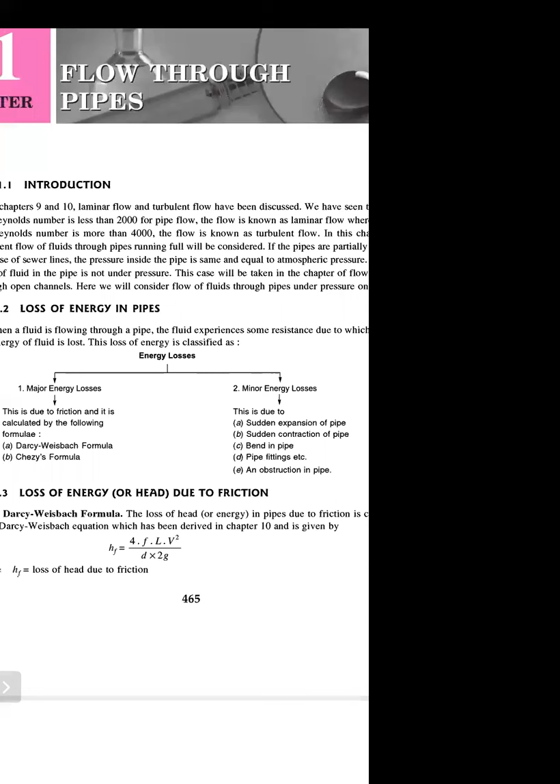Generally, in flow through pipes, problems ask about major loss and minor loss calculations. Major loss in pipe and minor loss in pipe - how to calculate loss of energy through that?

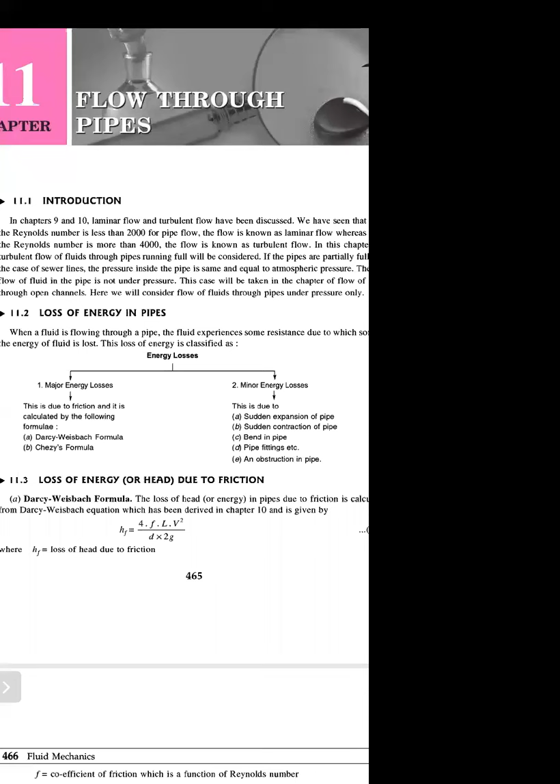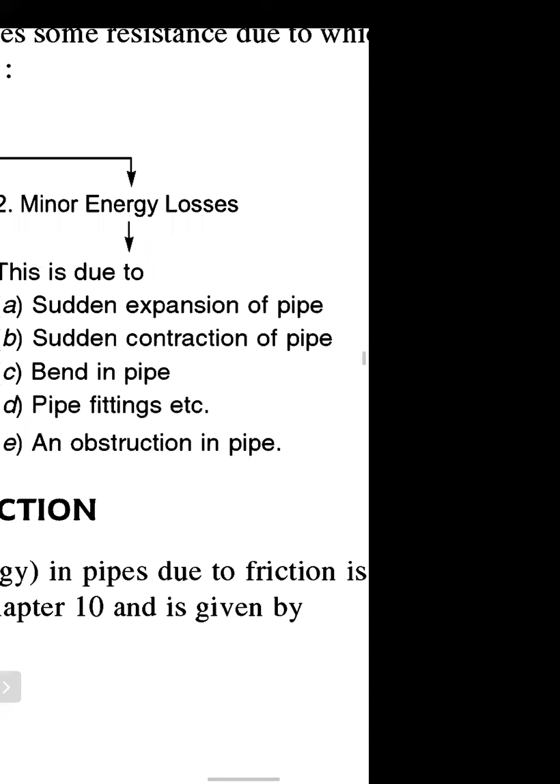Then the second type of minor loss is loss due to sudden contraction of pipe. As explained for expansion, suppose 10 centimeter diameter pipe at section 1, then it suddenly becomes 50 centimeter - then suddenly from section 1 to section 2 there is expansion of pipe.

Similarly, sudden contraction of pipe is there. In sudden contraction of pipe, initial diameter is greater than final diameter. It means if diameter of section 1 is suppose 50 centimeter and diameter of section 2 is 10 centimeter, then there will be sudden contraction of pipe. That loss is sudden contraction of pipe, which is taken in minor energy loss.

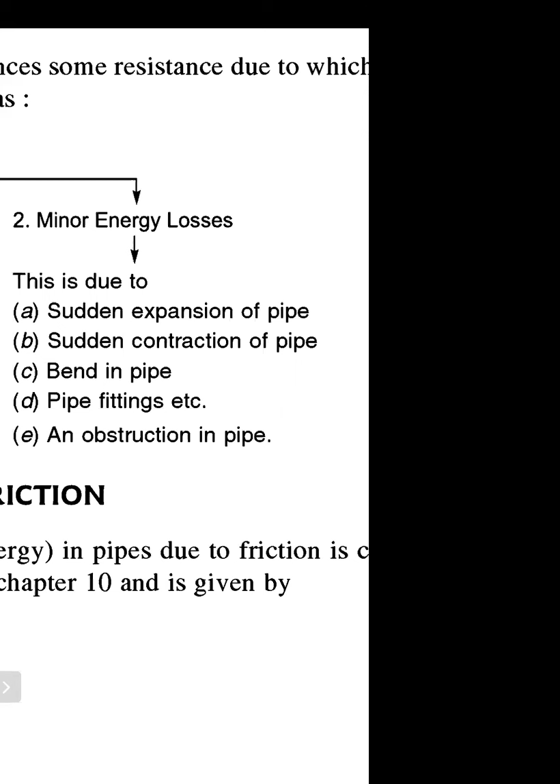In major losses, generally loss due to friction is major loss, and that friction loss is to be calculated by the following formulas: Darcy-Weisbach formula and Chezy's formula. Loss due to friction is major loss, and that is calculated by the Darcy-Weisbach equation or Chezy's formula.

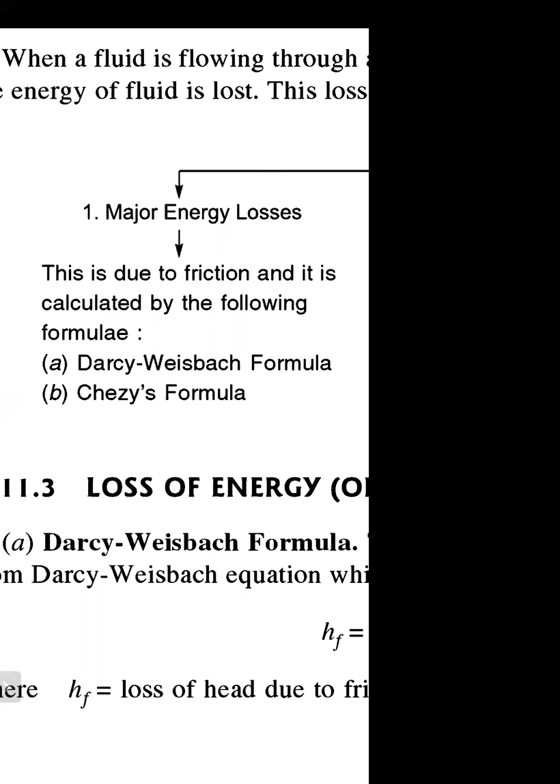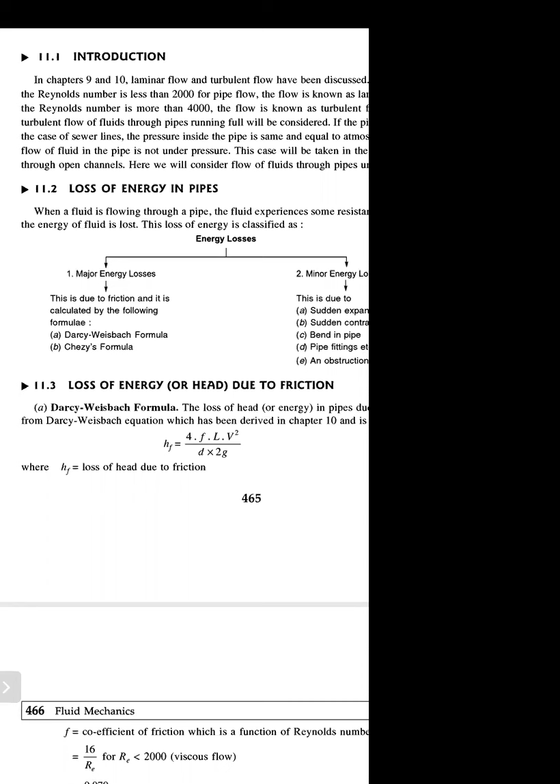Then major loss, loss of energy due to friction, generally by the Darcy-Weisbach equation: HF is equal to 4FLV square upon 2GD. In that, HF is head loss due to friction, f is the coefficient of friction, and the value of f is to be taken as f equals 16 upon RE when RE is less than 2000, where RE is the Reynolds number.

If Reynolds number is less than 2000, then coefficient of friction f is equal to 16 upon Re. And if it is varying from 4000 to 10 raised to 6, then the value of small f is 0.079 upon Re raised to 1 by 4.

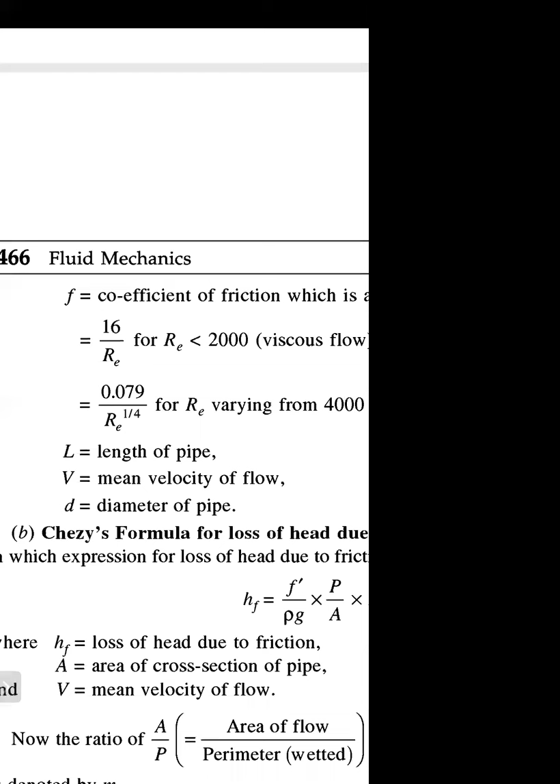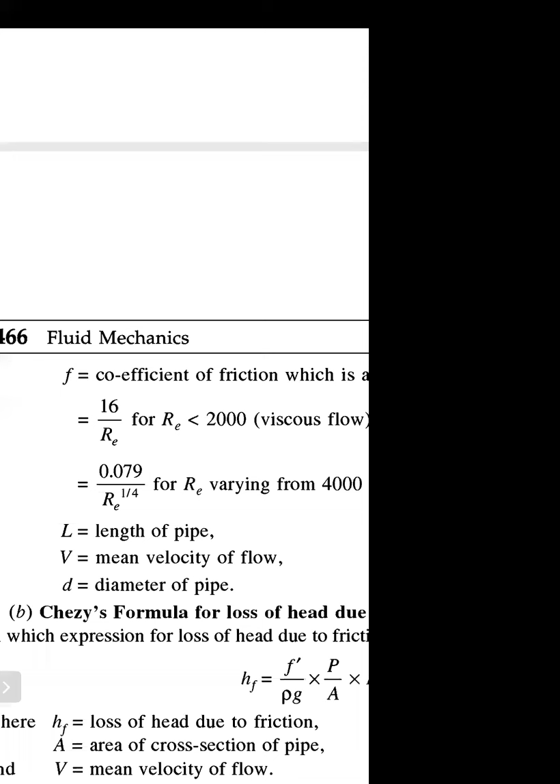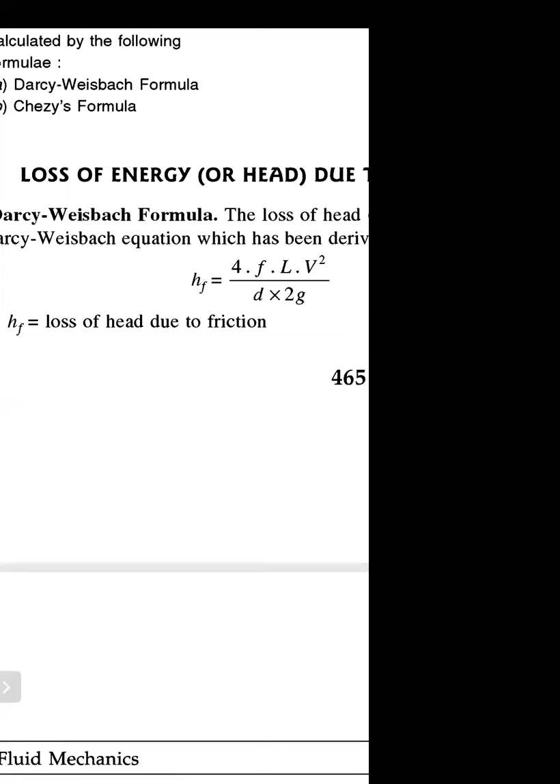According to the value of Reynolds number, coefficient of friction small f is to be changed. Put that value of f, value of length, velocity, diameter, and g, then you will get head loss due to friction, HF equal to 4FLV square upon 2GD.

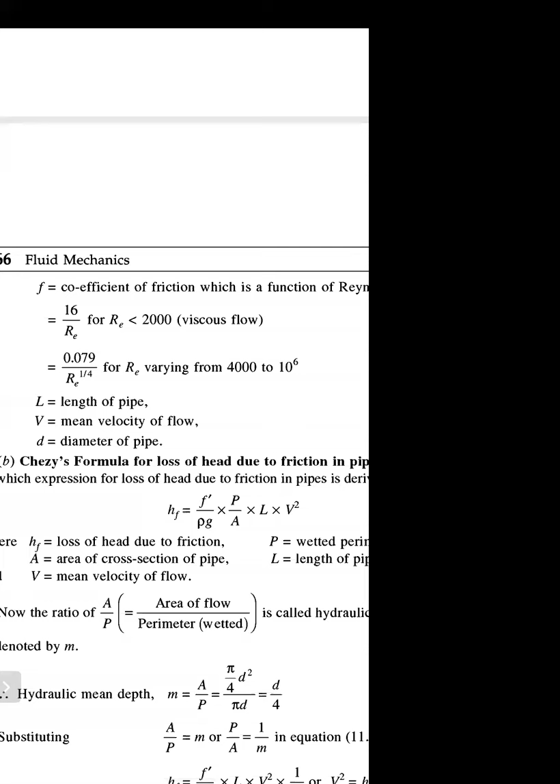This is the Darcy-Weisbach equation, 4FLV square upon 2GD. This is the major loss due to friction, and that major loss is generally calculated by the Darcy-Weisbach equation. That major loss is also calculated by Chezy's formula.

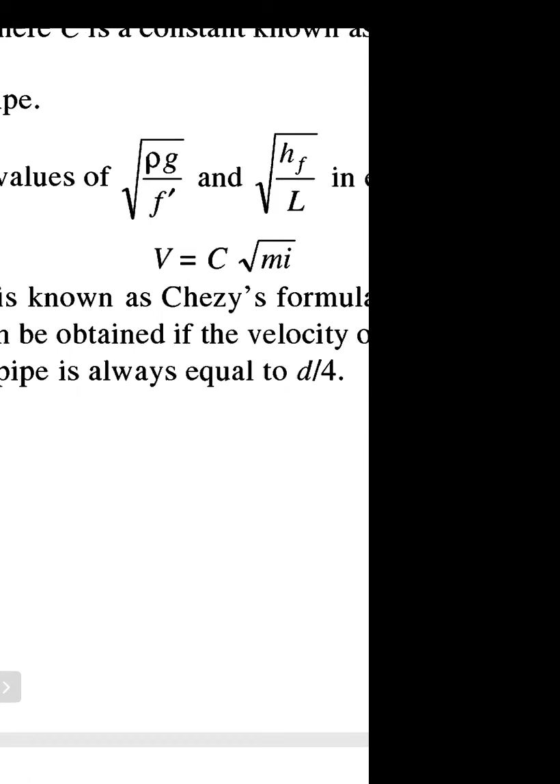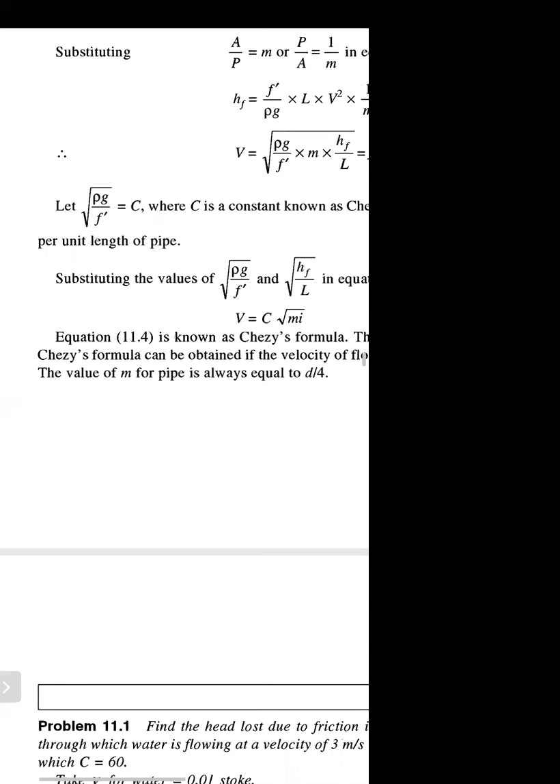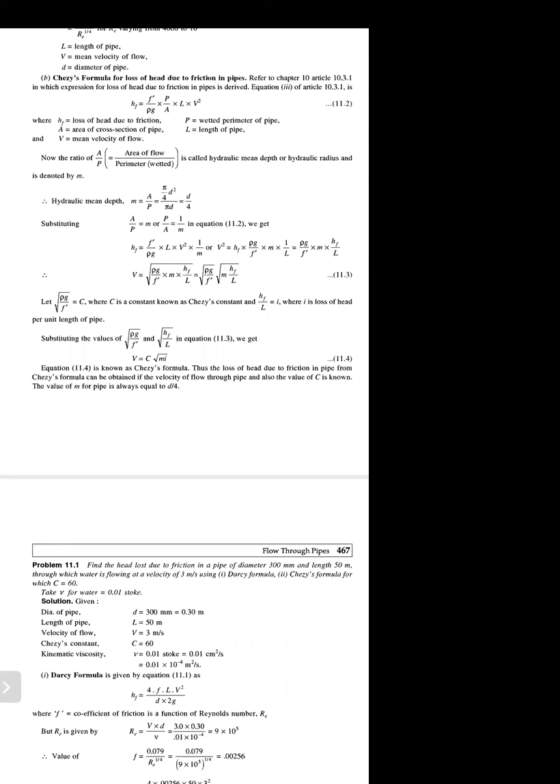What is Chezy's formula? V is equal to C under root of M into I, where V is the velocity, C is the Chezy's constant, M is nothing but hydraulic mean depth, which is area upon perimeter, and I is loss of head due to unit length of pipe. This is the Chezy's formula for calculation of friction in pipe.

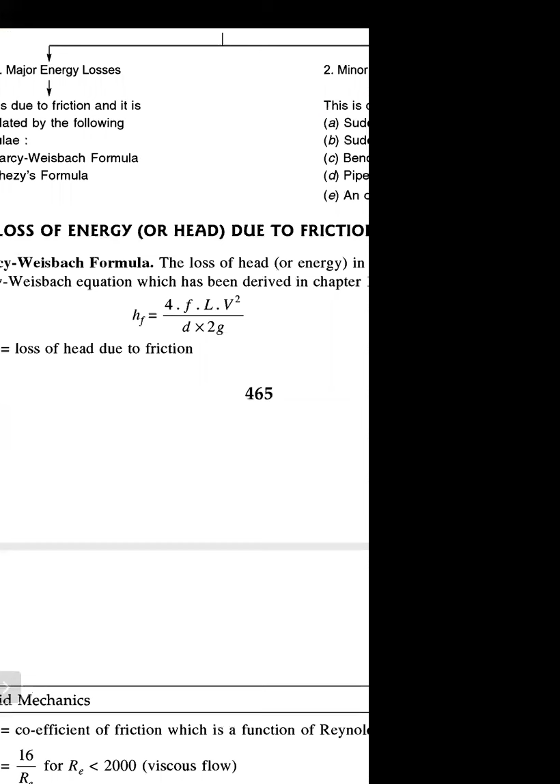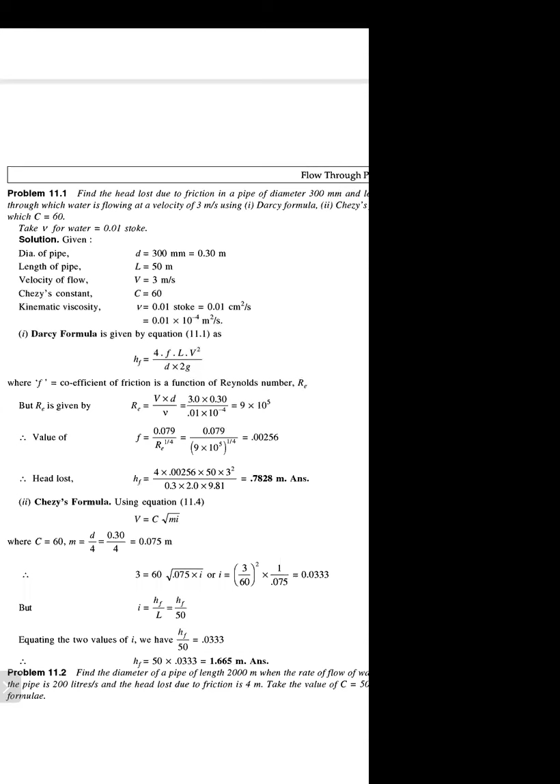There are some problems based on the Darcy-Weisbach equation as well as Chezy's formula.

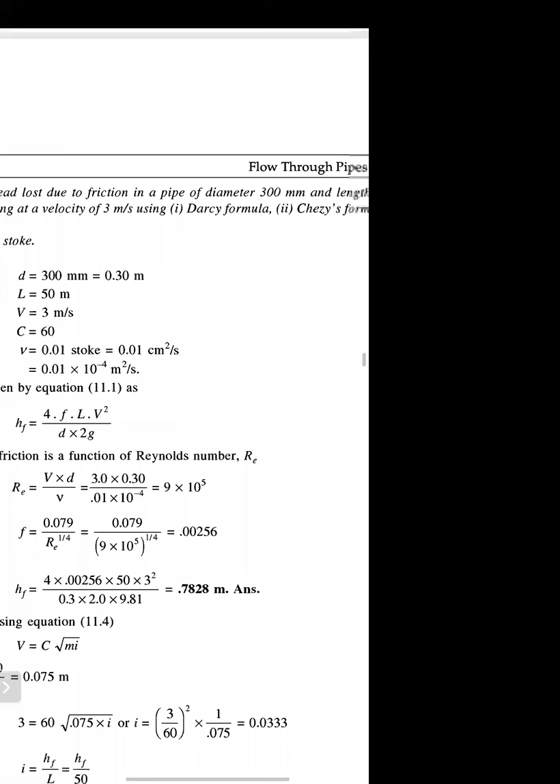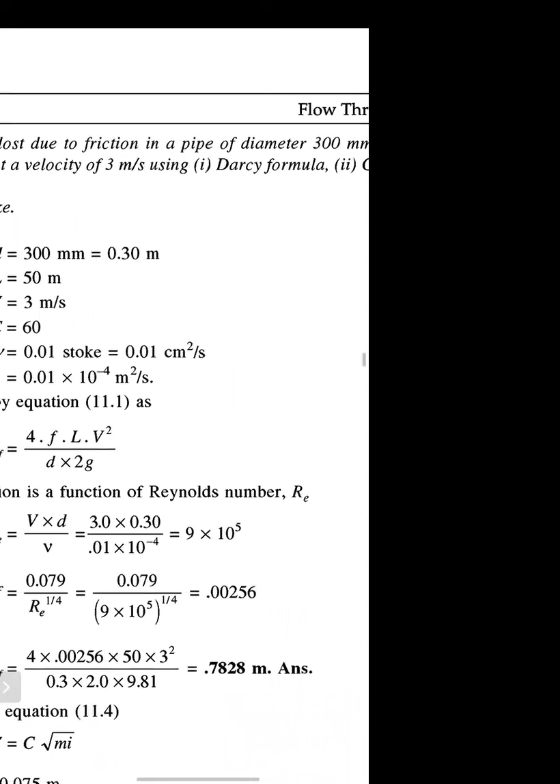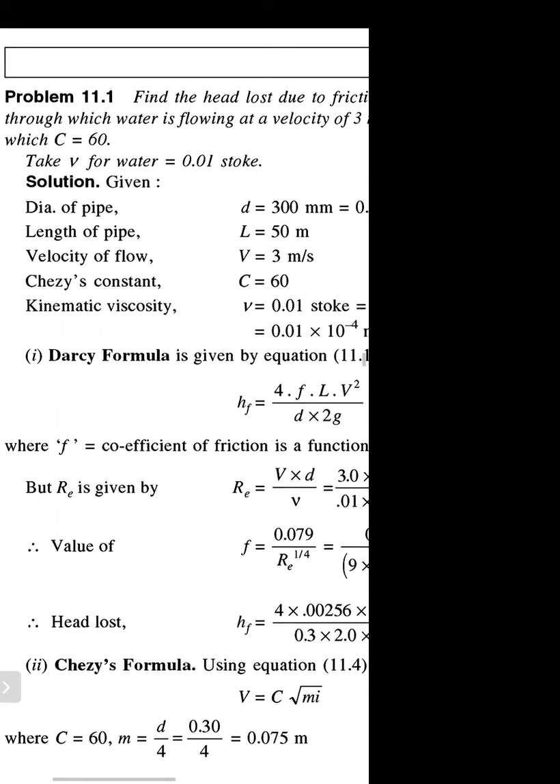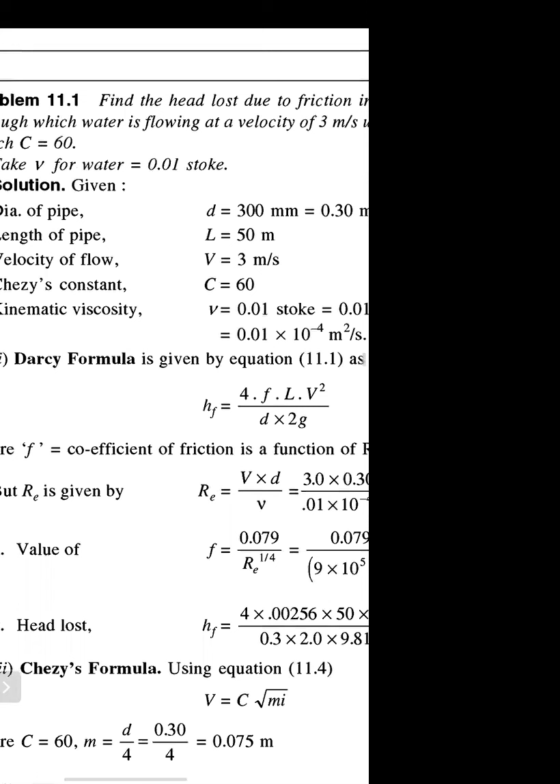First problem: find the head lost due to friction in a pipe of diameter 300 mm and length 50 meter, through which water is flowing at velocity 3 meter per second. Using Darcy's formula and Chezy's formula, for C is equal to 60, take kinematic viscosity of water as 0.01 stoke.

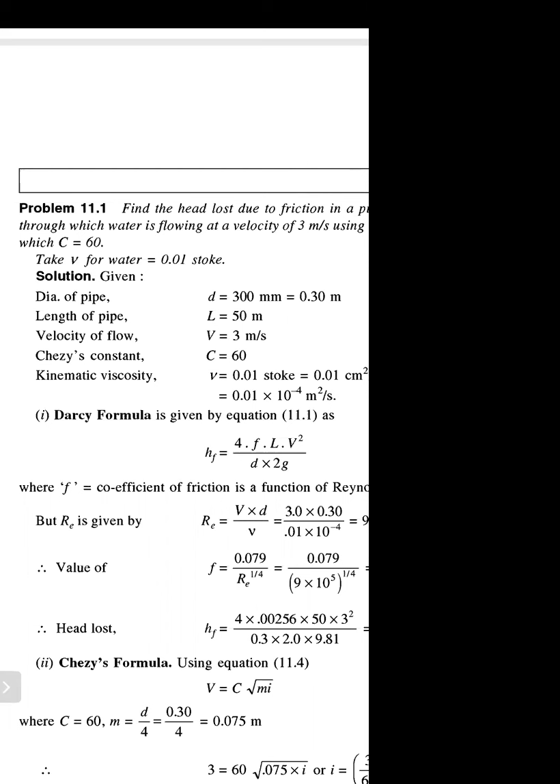Head loss due to friction means we have to calculate major energy loss through that pipe. According to given data, D is diameter 300 mm, length 50 meter, velocity 3 meter per second, Chezy's constant is given, and kinematic viscosity is given as 0.01 stoke, convert it into meter square per second: 0.01 into 10 raised to minus 4 meter square per second.

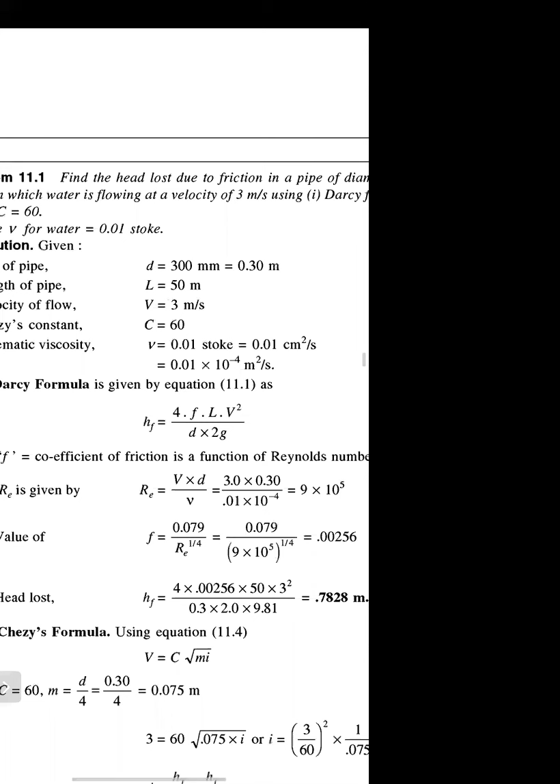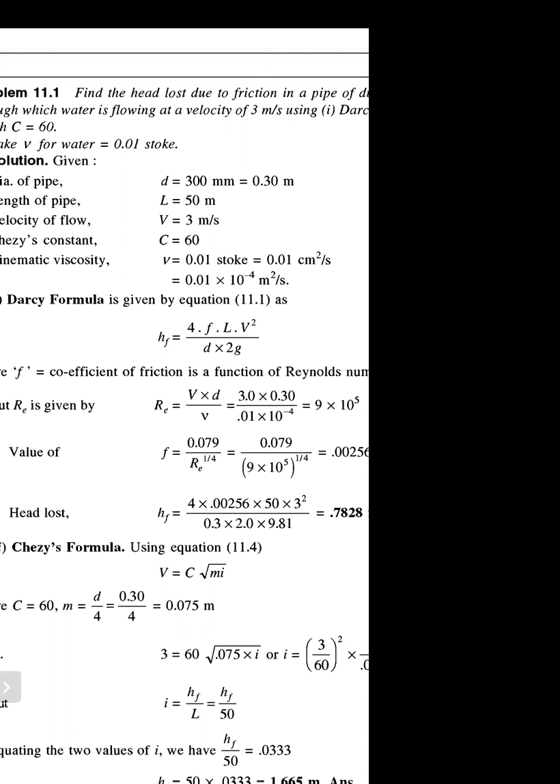Put the above value in Darcy formula because we have to calculate head loss due to Darcy formula first, and in second case Chezy's formula. Our Darcy formula is HF equal to 4FLV square upon 2GD.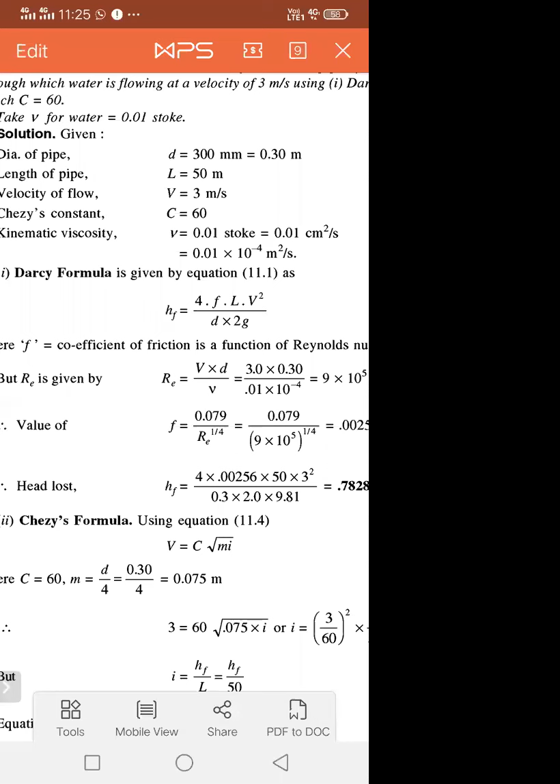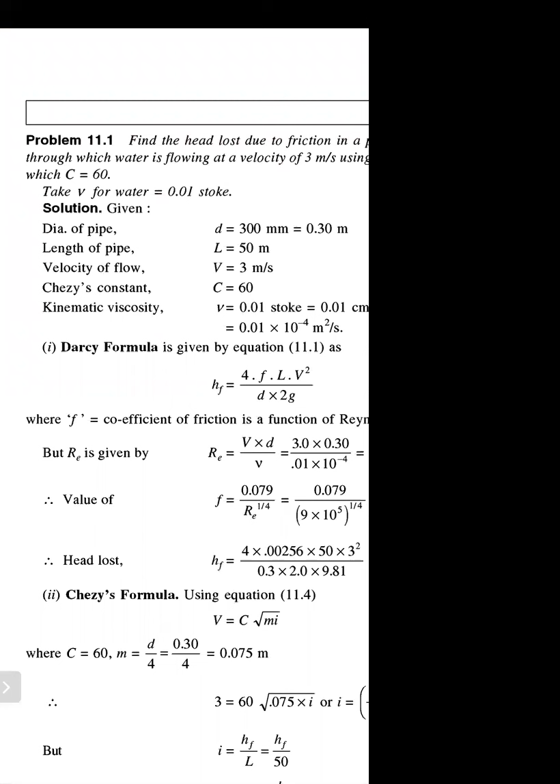Now calculate the value of F. As we know, value of F is to be calculated according to the value of Reynolds number. But we don't know the value of Reynolds number yet, so first calculate value of Reynolds number.

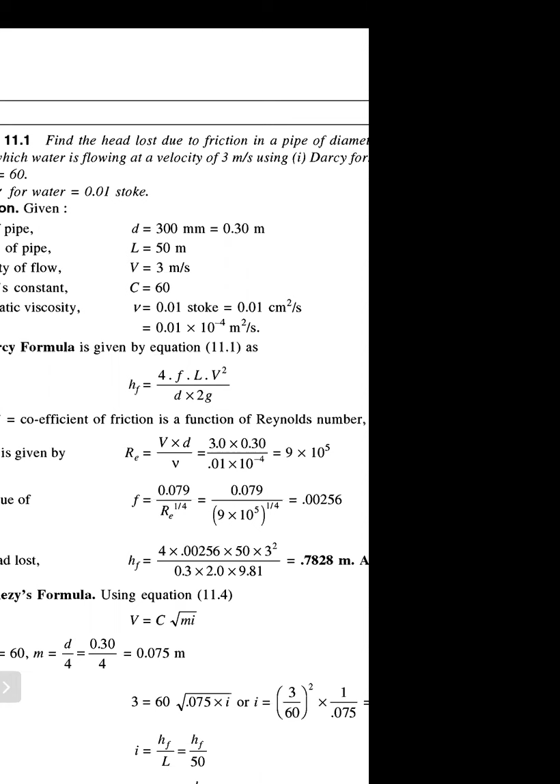The value of Reynolds number is calculated by V into D upon viscosity, whether it is mu or gamma. Therefore Re equals V, velocity 3 meter per second, diameter 0.30, and viscosity 0.01 into 10 raised to minus 4. By putting these values, your Reynolds number becomes 9 into 10 raised to 5.

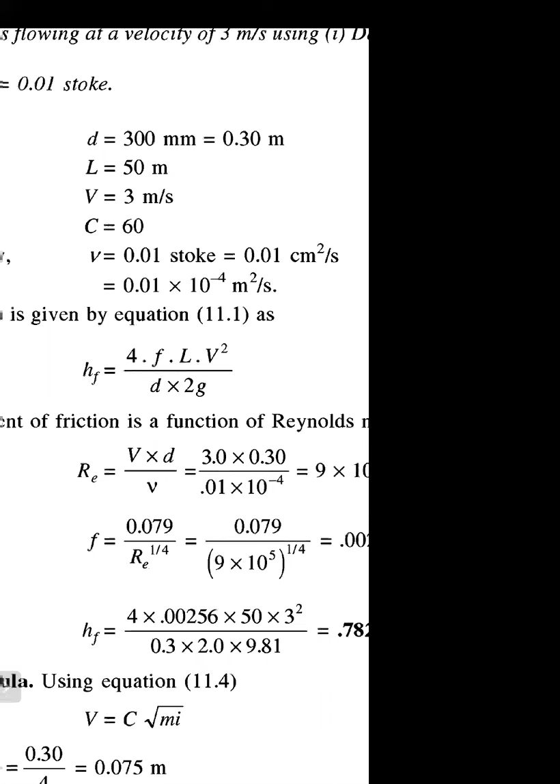Then calculate the value of small f, because we have to calculate head loss due to friction HF. For that, we should know the value of small f, coefficient of friction, as it is not given in the problem.

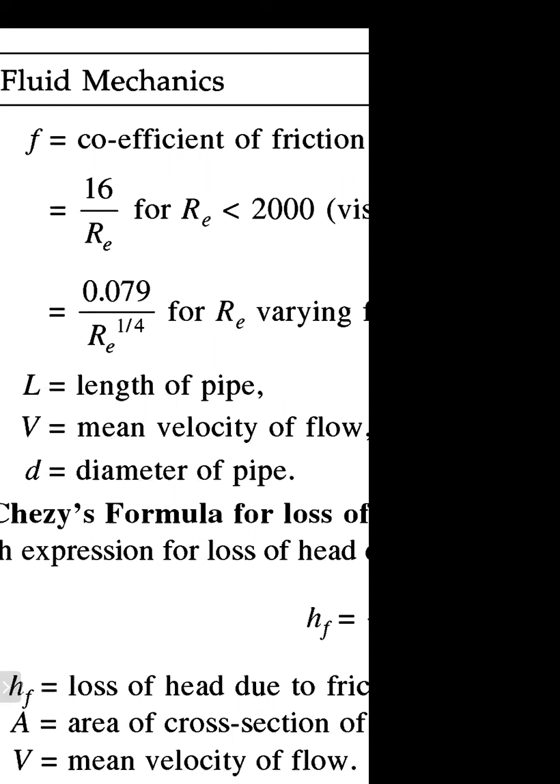As I had already told, according to the value of Reynolds number, coefficient of friction is calculated by F equal to 16 upon Re if Re is less than 2000. But if it is varying from 4000 to 10 raised to 6, then it is 0.079 upon Re raised to 1 by 4.

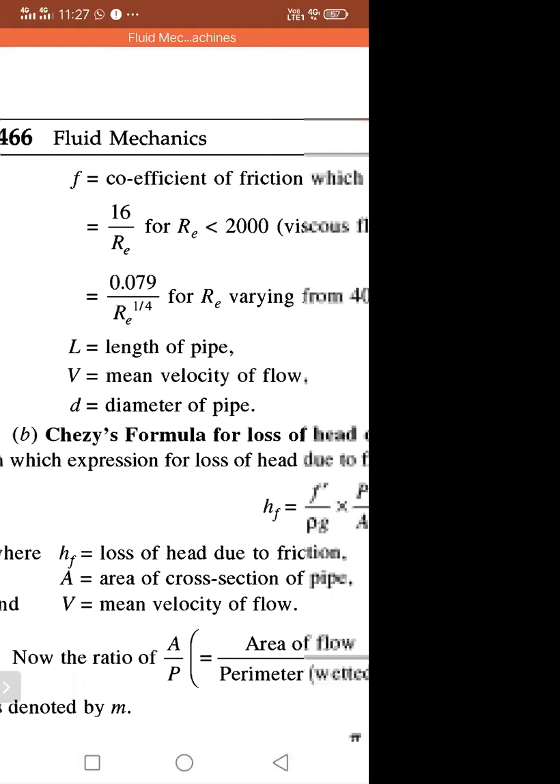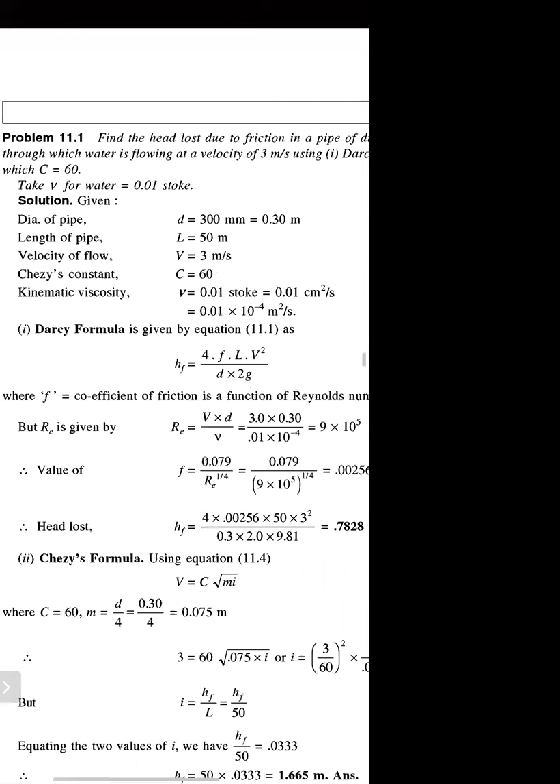From this formula, calculate the value of small f here. Value of small f is equal to 0.079 upon Re raised to 1 by 4, as it is greater than 4000 and in between 4000 to 10 raised to 6, being 9 into 10 raised to 5. Therefore F you will get.

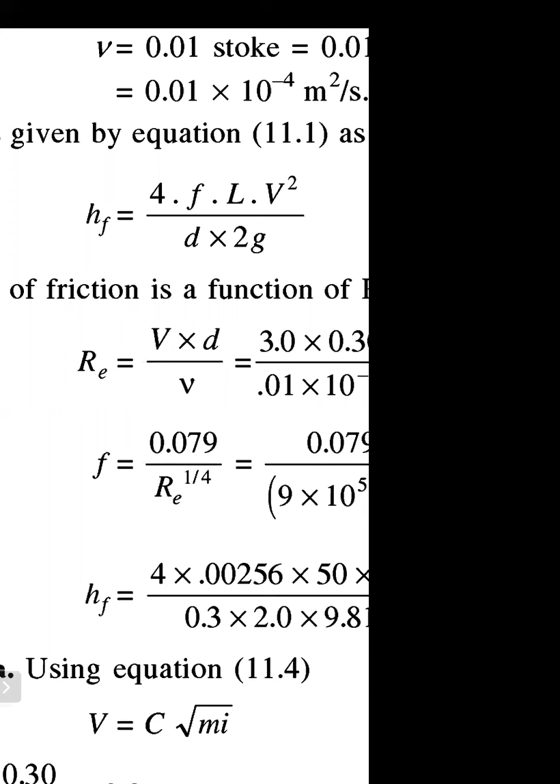F equals 0.00256. Now put the value of F and value of L, V, D, G in the Darcy-Weisbach equation. You will get HF, which is 0.7828 meter, head loss due to friction.

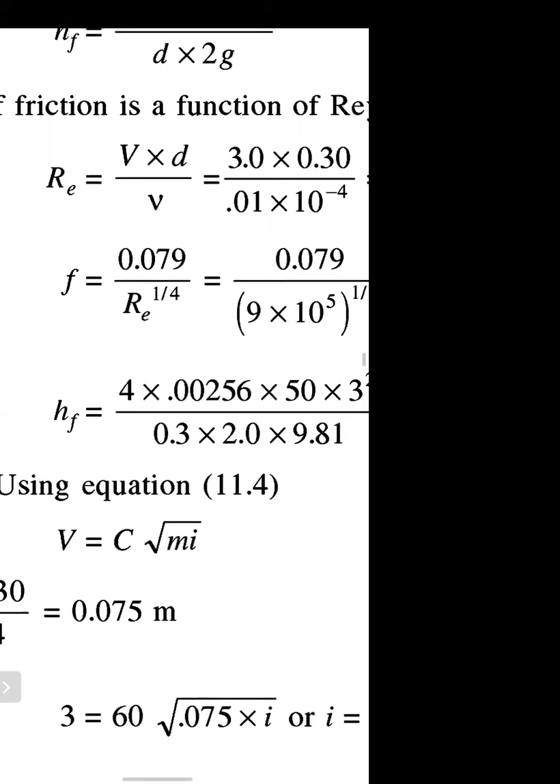Now again, we have asked in the second point to calculate head loss due to Chezy's formula.

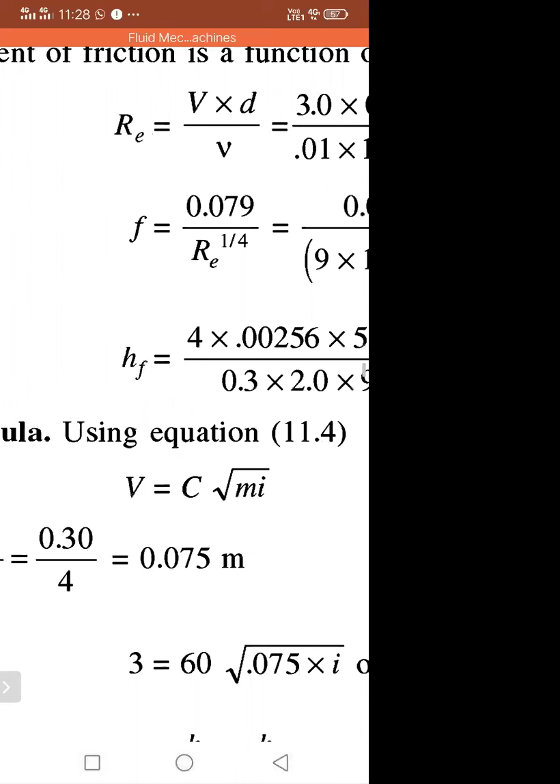Okay, calculate head loss due to Chezy's formula. For Chezy's formula, the value of C is given. Then calculate value of M, which is D by 4, and you will get 0.075. And I is to be calculated by I is nothing but HF upon L. Then calculate I, put that value in the above equation, you will get the value.

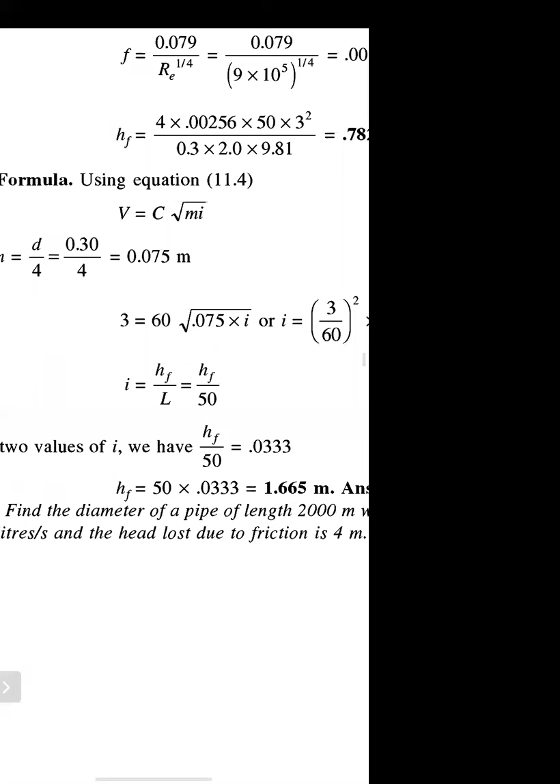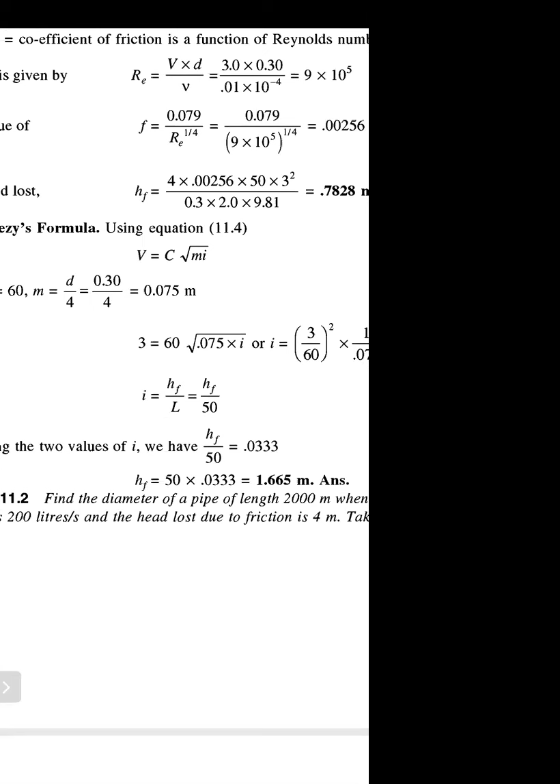The value is equal to 50 into 0.0333 is equal to 1.665 meter. This is head loss due to friction.

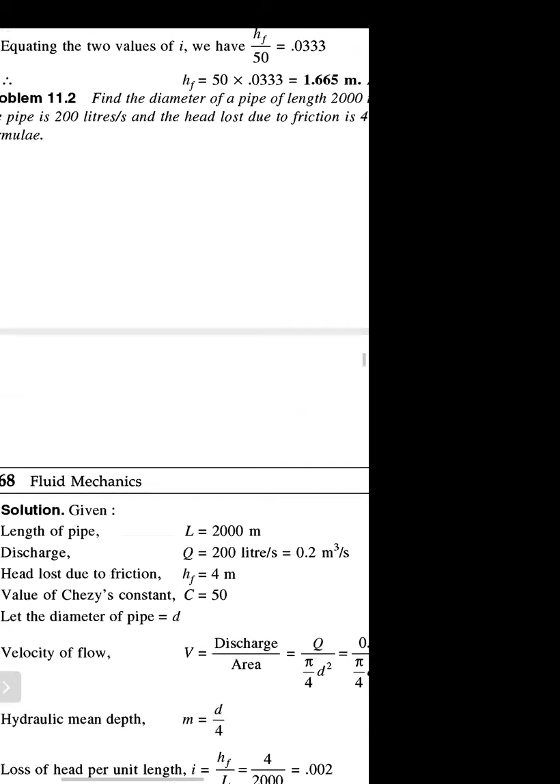Okay, such types of problems are asked related to calculation of head loss as well as from Chezy's formula.

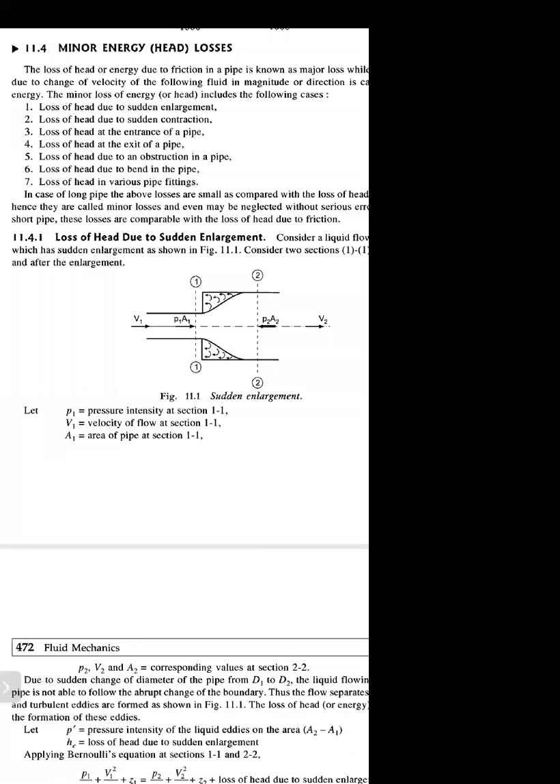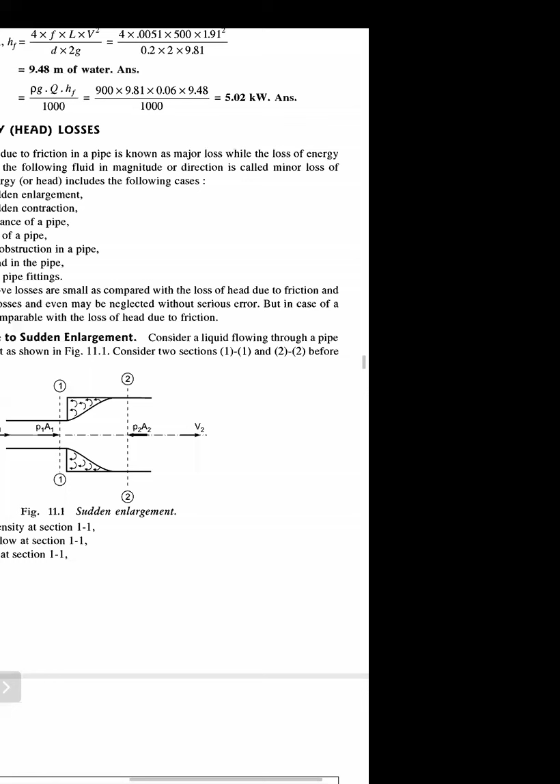Now, minor energy losses. As we had already said, the loss of head or energy due to friction in pipe is known as major losses, while the loss of energy due to change of velocity of the flowing fluid in magnitude or direction is called minor loss through pipe. And that minor loss of energy or minor loss of head includes the following cases.

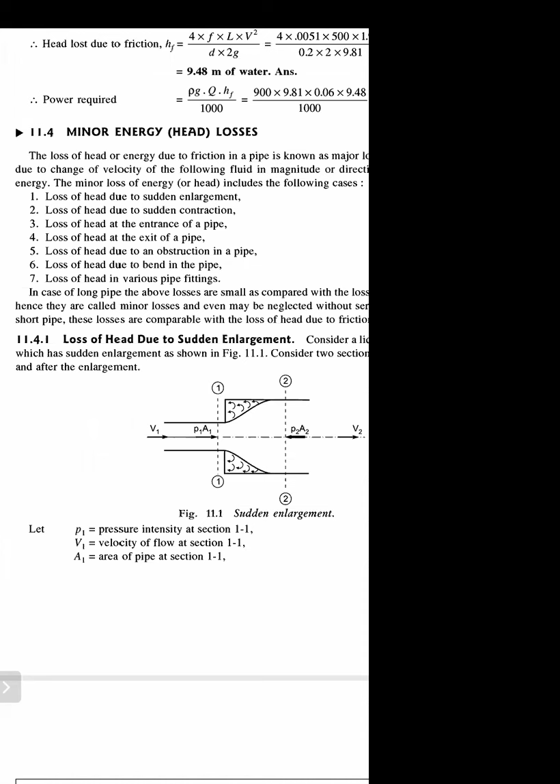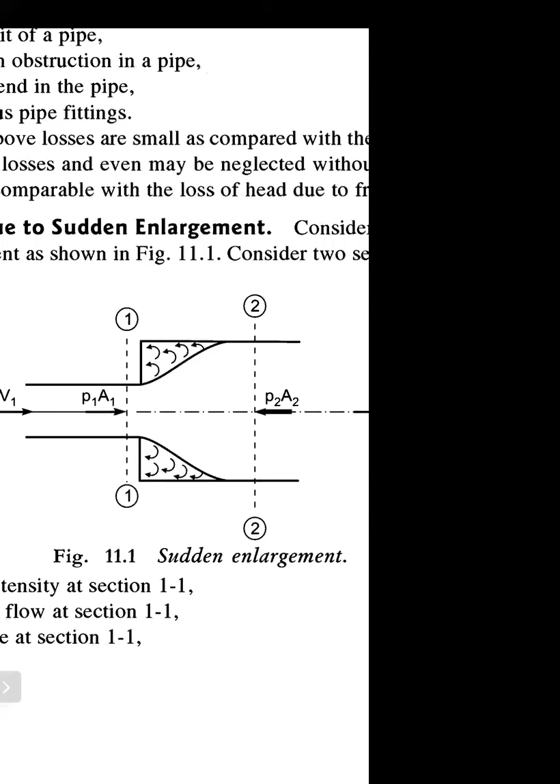Now this is the section, this diagram - here section 1-1 to section 2-2. As liquid is flowing from section 1-1 to section 2-2, direction of flow from left to right, there is sudden enlargement of pipe. Therefore, this is the first type of loss of head due to sudden enlargement. This is the diagram of sudden enlargement.

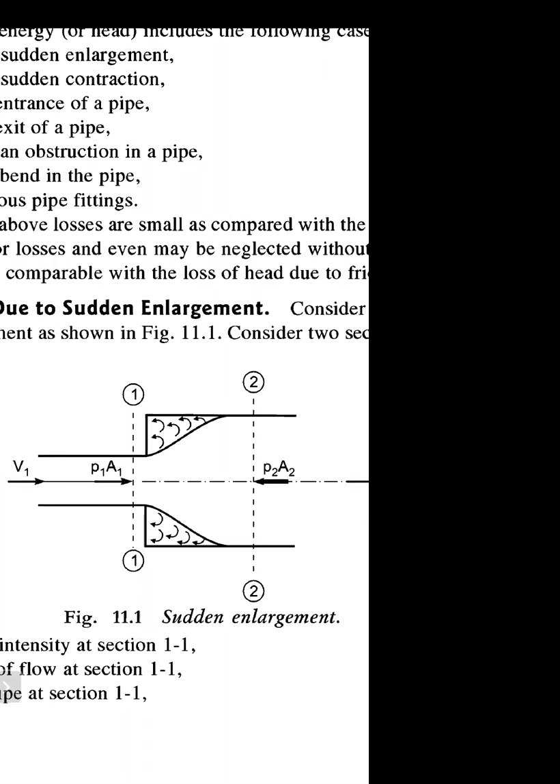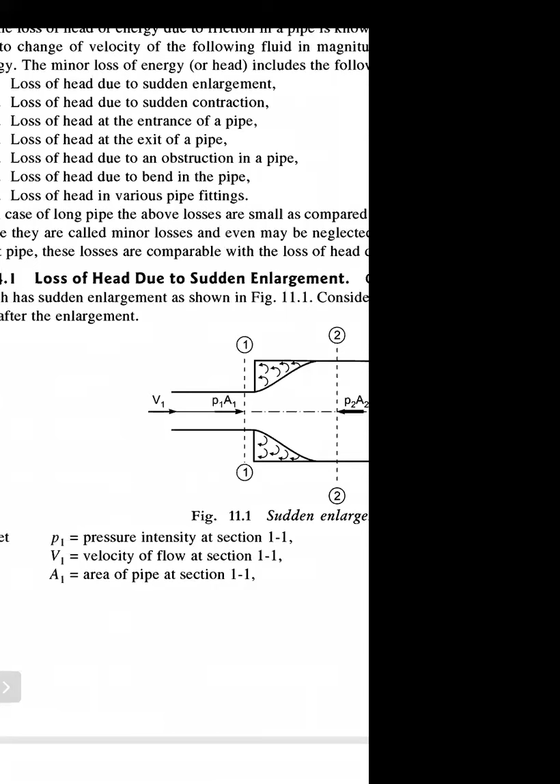Okay, then that loss of head due to sudden enlargement - first point, loss of head due to sudden enlargement is to be calculated by the formula HE is equal to (V1 minus V2) bracket square upon 2G. This is the formula for calculation of loss of head due to sudden enlargement.

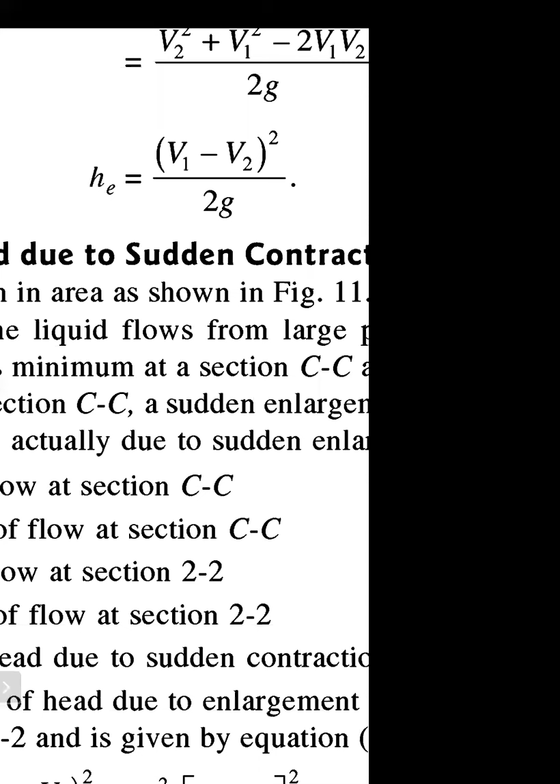Okay, where V1 is the velocity of pipe at section 1-1 and V2 is the velocity at section 2-2. Okay, and G is acceleration due to gravity, and that HE head loss due to sudden expansion is to be calculated, and that loss is minor loss in pipe.

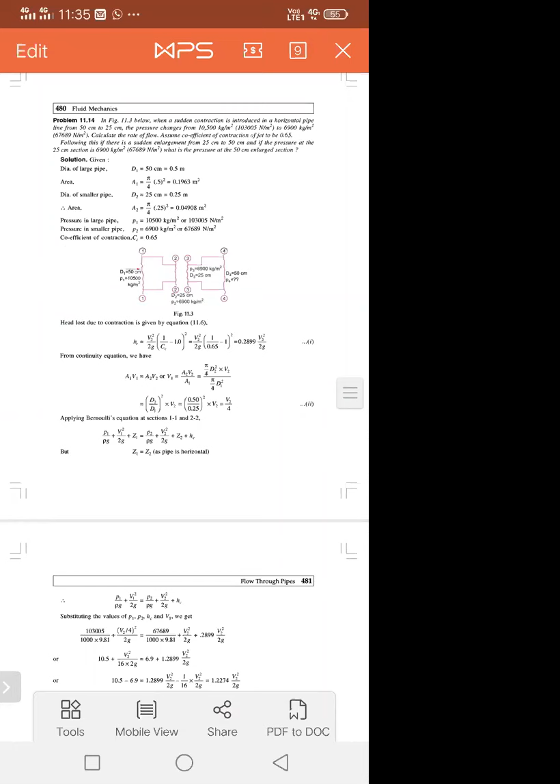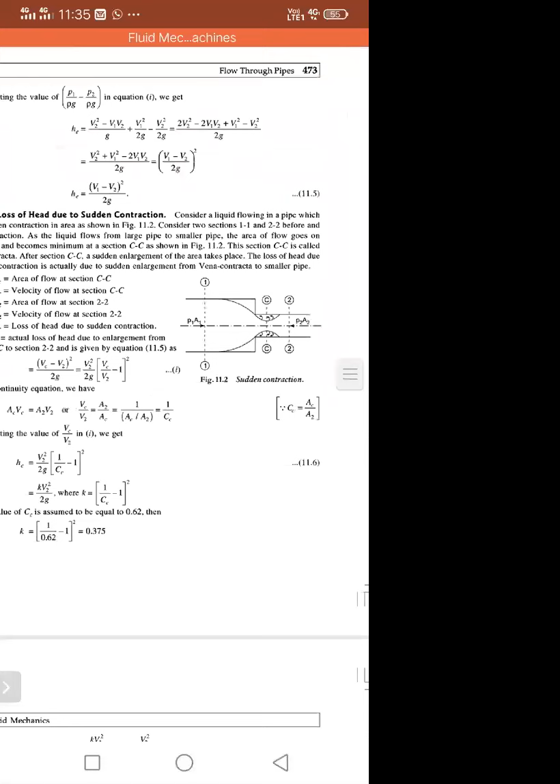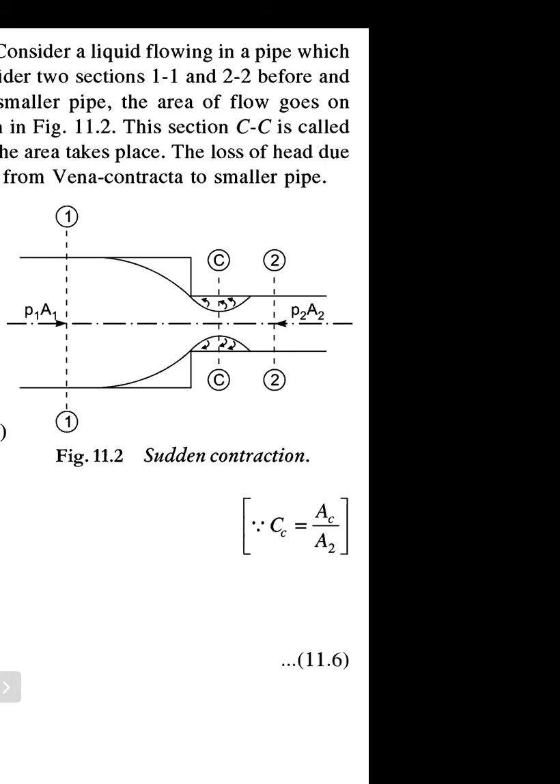Loss of head due to sudden contraction - see this diagram, section 1-1 to section 2-2. Water is flowing from section 1-1 to section 2-2. Then there is possibility of loss of head due to sudden contraction. Okay, and here section C-C is also drawn, and that section C-C is the contraction. Okay, we have to take the coefficient of contraction while solving problems on loss of head due to sudden contraction.